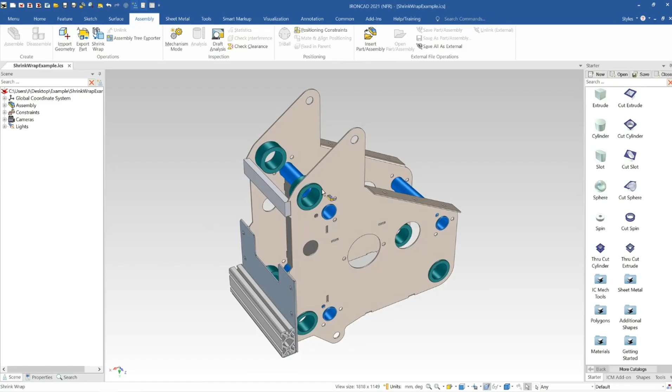In this example, I'm going to do a shrink wrap on this assembly here. I'll click on the shrink wrap command, and now you can see the shrink wrap options here on the left. It's worth noting that these options probably look more complicated than they are. When going through each one, they're actually quite easy to understand.

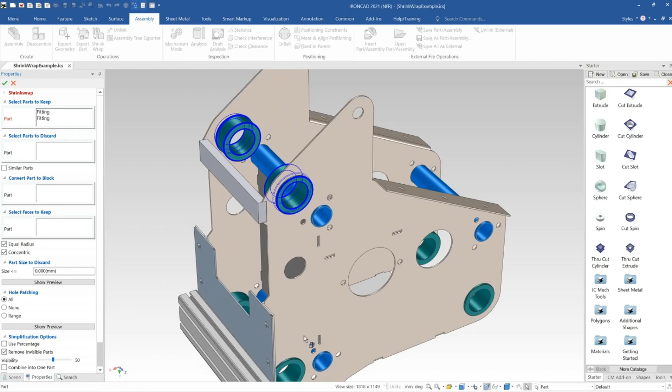The first option here is to select the parts that we definitely like to keep in our final simplified model. In this case, I'm going to choose these green parts. So those parts will be kept unchanged in our final output.

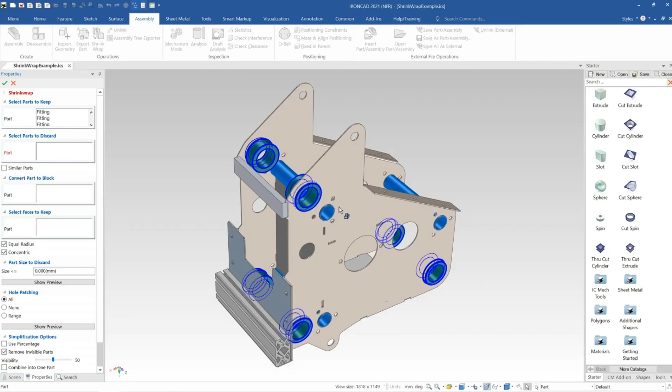The next option here is to choose the parts that we'd like to discard. We can also check to automatically select similar parts if we'd like to, but I'm going to leave that unchecked for now. And I'm going to select these 3 blue parts to discard from our final output.

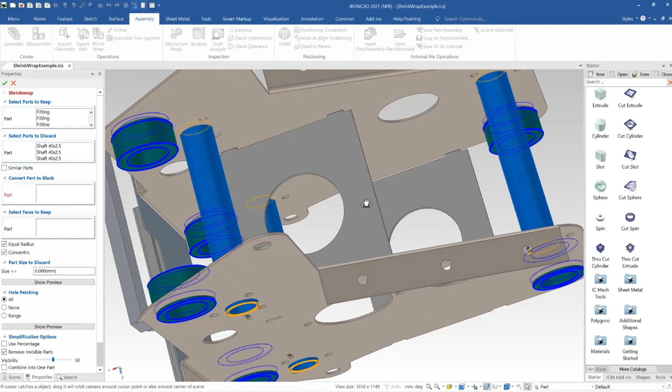The next option here is to automatically convert parts into simple blocks. This will essentially take the boundary conditions of the part and create a simple block with no holes or anything.

So in this example, I'm going to select these plates. These plates have tabs on the outside and also a hole in the center. When they're turned into blocks, it'll take the furthest out it can go in each direction and turn it into a simplified block, and of course remove that hole in the center as well.

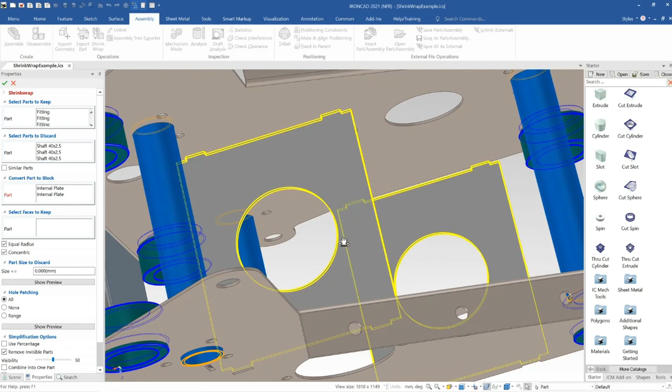The next option, and likely one of the most important options, is to select faces to keep in the final output. This is important when you have holes that you'd like to keep as mounting holes, for example.

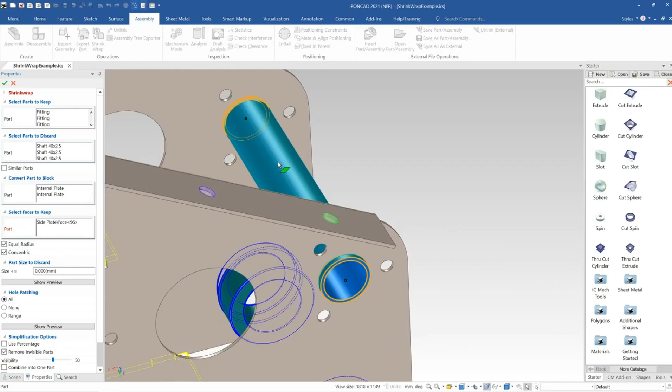In this case, I'm going to zoom in and select this hole here. As you can see, these holes have automatically been selected and highlighted green. That's because they have an equal radius, and we have this option here checked to automatically select holes with an equal radius. The other option we have here is to automatically select concentric faces as well.

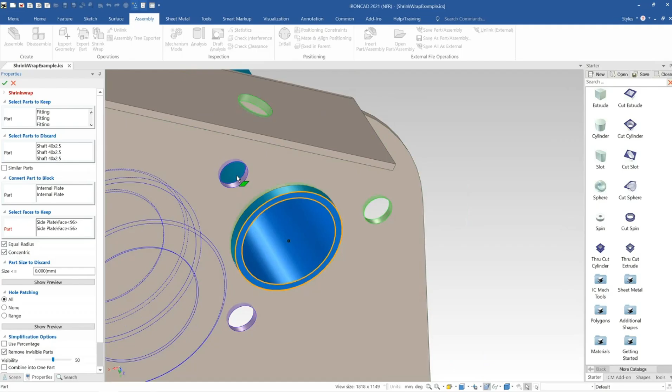I'm going to zoom in and select this hole too, and as you can see, those ones have been automatically selected as well.

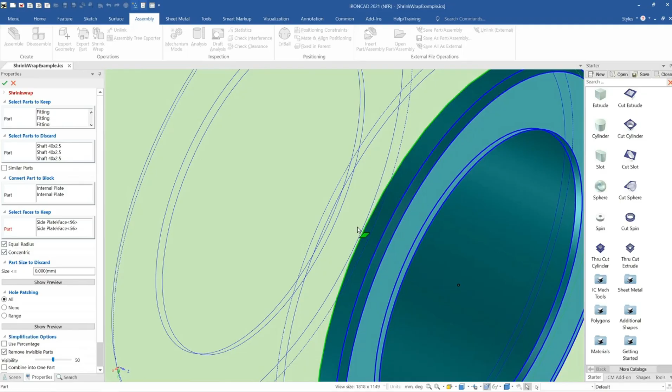And now I'm going to go in and select this hole here. Now, as you can see, it may be hard to select that face because it's covered by this first part. So to select it, we'll zoom in to where the face approximately is, then press Ctrl-Alt and then select. So hold down Ctrl-Alt on the keyboard and select.

Now you'll get an option to select other items behind where the mouse is. So in this case, I'm going to select this second face here. Now with that selected, this concentric face here has automatically been selected to keep as well.

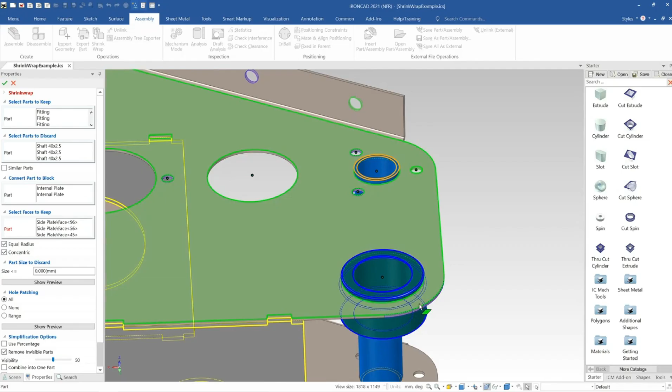The next option we have is to discard parts below or equal to a certain size. We can either use a measurement, like we have here, in a certain dimension. So we can say we want all holes below 100 millimeters to be removed, for example. Or we can use a percentage, so all holes below 30% can be removed. In this case, though, I'll leave it as millimeters, but I'm going to leave it at 0 and not worry about that one.

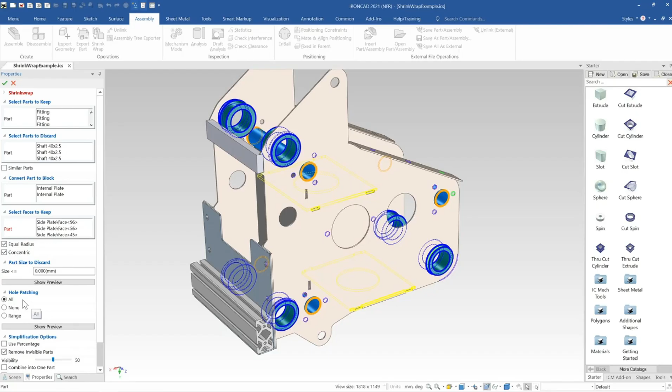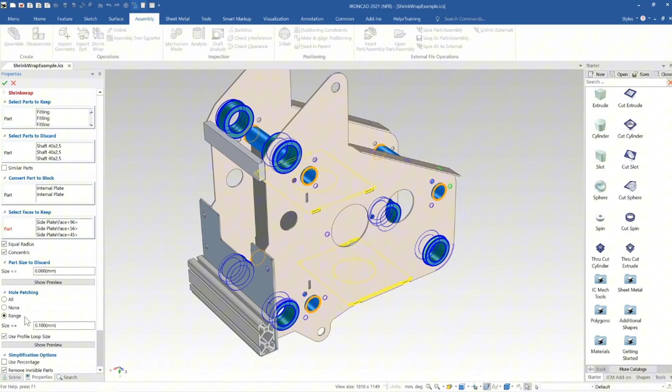The next option here is for hole patching. This will essentially patch holes in our parts to simplify them. We can choose to patch all holes, or none, or a range. So you can again choose to, for example, patch all holes below 100 millimeters. Instead of discarding all parts below 100 millimeters, we're going to patch all holes below 100 millimeters. And again, we can choose to use percentage there if we'd like to, with the percentage option here. In this case, I'm going to patch all holes, and I'm going to click on Show Preview. And now you can see a red preview of the holes which will be deleted.

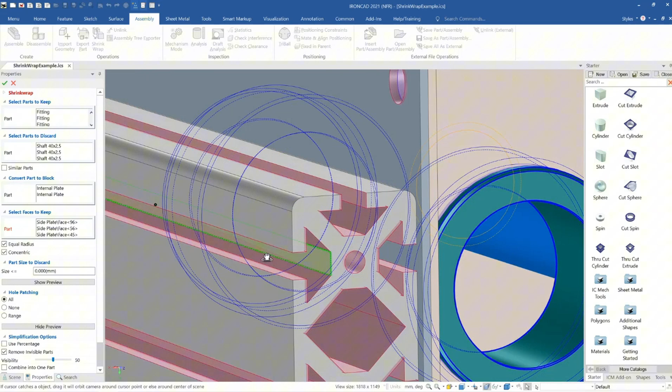If we zoom into this extrusion, you'll see that pockets are also included. These pockets in the extrusion will automatically get deleted as well, to simplify that into close to a simple rectangular part.

It's worth noting that if we wanted to keep those pockets, we could simply select those as faces to keep, or we could select the entire part as a part that we'd like to keep the same.

Next, we have a few final options here, which we'll go through. We can remove invisible parts. In this case, there aren't really any invisible parts here. But in some examples, like the engine example I mentioned earlier, you may have many parts inside the engine which are actually invisible and hard to select. So this option allows you to remove anything that you can't see from the outside.

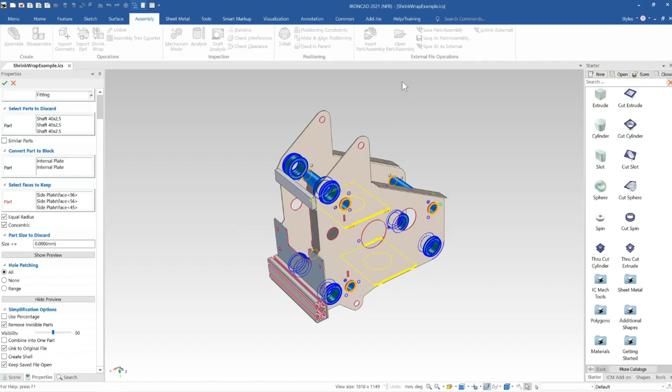The next option we have here is to combine the output into a single part. That will combine the assembly just into one part when it goes into the simple model, instead of being multiple individual parts. I'm going to leave that unselected.

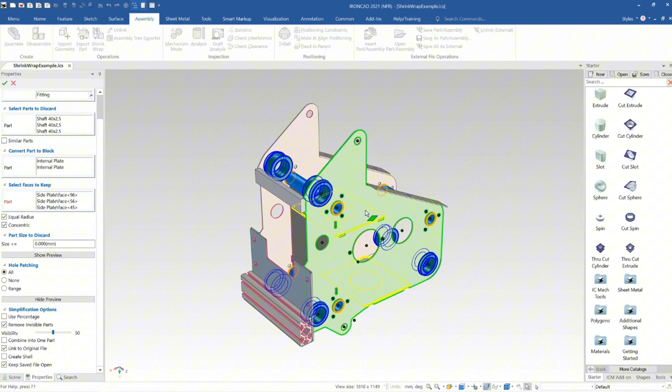We can choose to link to the original file. This is useful because later on in our original file, we can actually edit that shrink wrap. So if the parts are linked, it means we've got two separate files, a simple model and the main model. We can go in and change our main model and tell that model to also update the shrink wrap model for us. So I'll leave that one selected.

We can also choose to create a shell of the model on the output, which will turn the solid model into a surface model when it's outputted. In this case, we'll leave that unchecked as well. And I'm also going to leave Keep Saved File open.

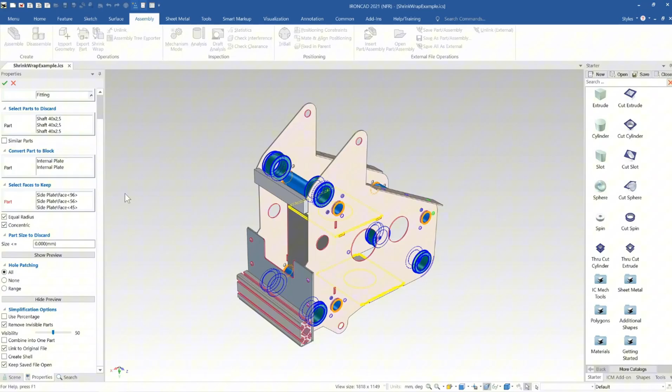Then I'll hit OK, and the system will go through and perform the shrink wrap operation. It will ask me to then save the simplified file. You can see it's the same file name with _simple added to the end.

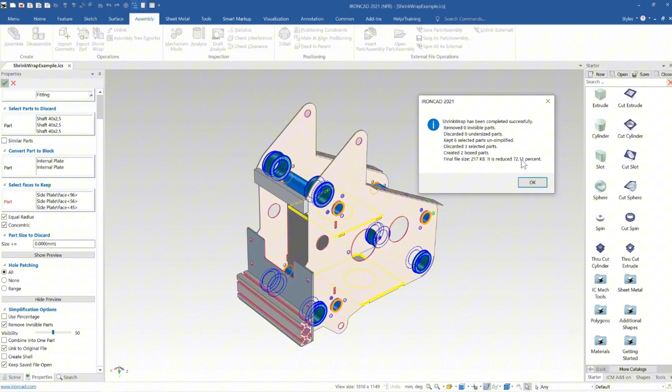Now we have a dialog showing us what has happened in our shrink wrap operation. We've removed 0 parts, we've discarded 0 parts, 0 invisible and 0 undersized. We've kept 6 selected parts unsimplified, we've discarded 3 selected parts, they were the blue ones. We've created 2 box parts, they were the yellow ones there, and the final file size has been reduced by 72%. Now I'll click OK, and that will then open up our shrink wrap model.

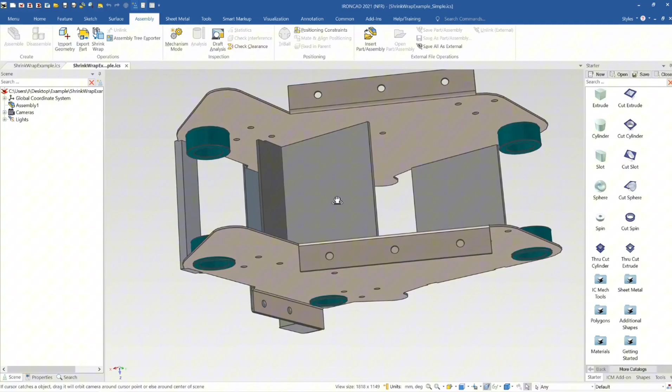And now you can see the final output. If we have a look at the extrusion, this is a good example of those items being removed there. And other big holes and things have been removed here as well. These plates have been turned into simple blocks. And those blue items have been removed.

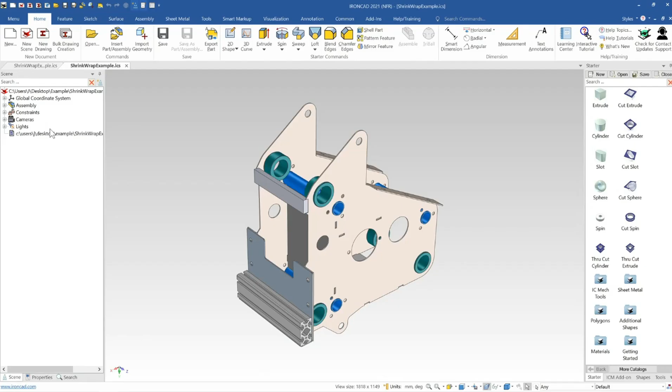Now if we go into our shrink wrap example model here, and we just close that one down, and I'm going to say yes, we want to save that. And then we open that one up again. You can see now that we actually have a link to our simplified version. And we can right click on this and edit the shrink wrap.

So if we make a change, for example here, let's go ahead and make a change to this model. I'm going to just do something simple, maybe paint this red. Of course, it doesn't have to just be a color change, it can be a real model change too.

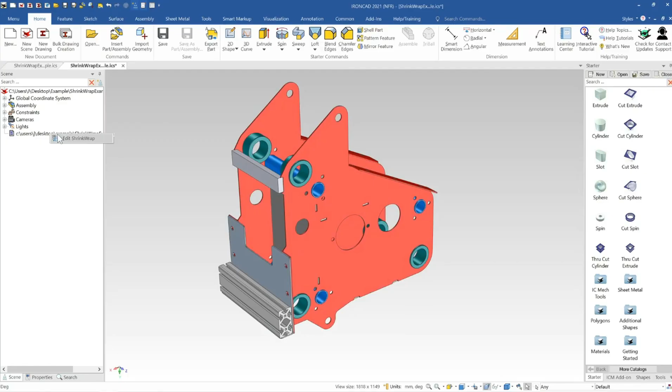And then I'm going to right click and select Edit Shrink Wrap. Now this will show us the selection that we made previously, which is useful, and we can customize that if we'd like to. I'm going to leave it as is. Simply hit OK. That will go through and re-perform the shrink wrap operation and then save it to that file. So now you can see this file has been updated and the parts are now red.

That's how to use the shrink wrap command.